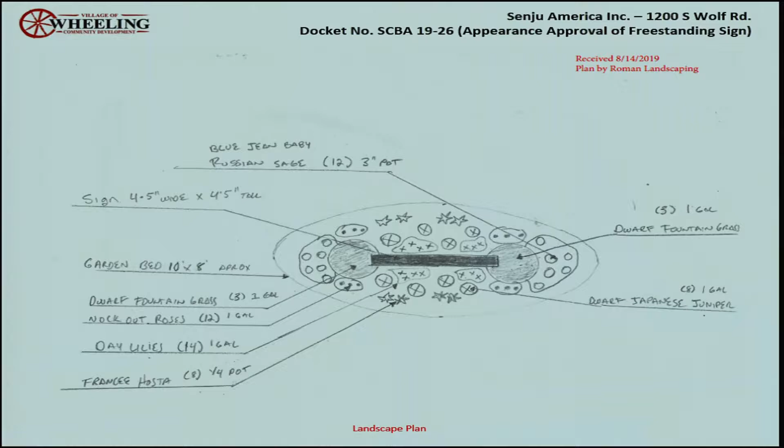Docket number SCBA 19-26, Senju America, 1200 South Wolf Road, appearance approval of a freestanding sign. And docket number SCBA 19-27, Asteroid Precision, 1085 Chaddick Drive, appearance approval of a wall sign. Oh, that's the new spec building on Chaddick. Okay.

Do I hear a motion? So moved. Second. Commissioner Creech? Yes. Commissioner Kalis votes yes. Commissioner Blanova. Yes. Commissioner Yudnick. Yes. Commissioner Sprague. Yes. Commissioner Thompson. Yes. Chairman Johnson. Yes.

Items for review. Docket number 2019-18, which was continued from August 8th, 2019. Village of Wheeling amendment to the comprehensive plan for the station area plan.

The Village of Wheeling seeking an amendment to the comprehensive plan for the Village of Wheeling Station Area Plan to update the entirety of the station area plan. It's public hearing information.

Anything to add? You, Steve? Yes. Okay. Take it away.

As the Plan Commission is aware, the station area plan update has been presented a few times in front of the Plan Commission in draft form, primarily through the summer. At the last meeting, the last full discussion on this was June 27th, where we obtained some additional feedback and input from the Plan Commission. That information was taken, and the final draft that we have tonight has been prepared for your consideration, taking into account that input and some further revisions by the village's consultant on the station area plan.

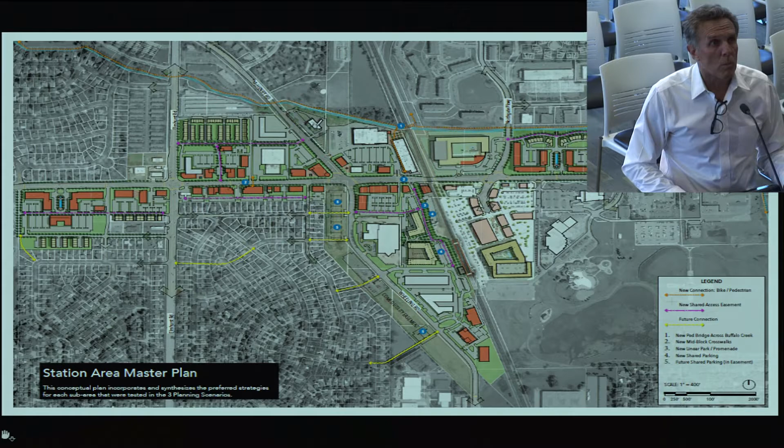Okay, all right. So I was going to ask Tim to lead you through some of the 8 sub-area plans. And for anybody watching who may not be familiar with the history of this project, this is a pretty important page.

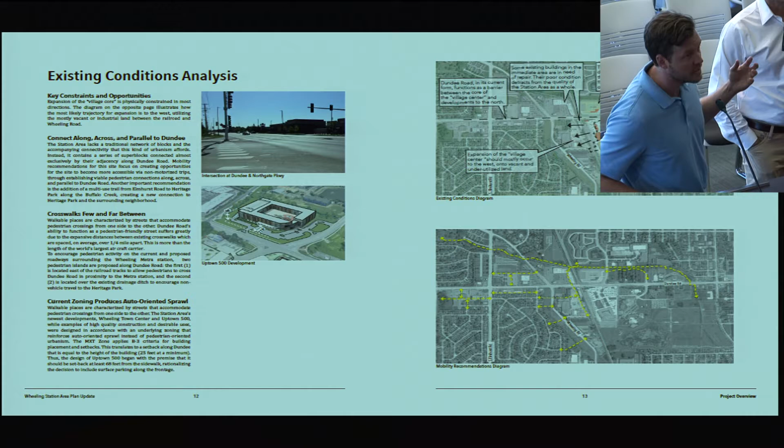This is what we call the existing conditions analysis. We have a very nice beginning of a town center—we've been calling it a pedestrian-friendly village center because 'town center' is already taken. One thing that came out of the survey was broad support for the idea that there should be a walkable core near the station area, but there are challenges to that.

Dundee Road is a bit hard to cross right now. It's not the kind of street that has a lot of strength on either side of it in terms of being able to cross. Also, the train tracks are a physical barrier east and west. This analysis points out that it seems like the natural place for the station area to expand is towards the west, which is something we've touched on in the past, but this page makes it explicit as a recommendation.

And then the idea that a lot of these sub-areas are basically like what we call super blocks. There's not a street network that allows choices of how to get from one place to another—so in the end, they all relate to Dundee Road. Almost the only option is Dundee Road, where they have to have their own curb cut connection that way. That was an important thing I wanted to point out.

One last part here, since it came up last time, was a little critique of some of the recent developments—they're beautiful in a million ways, but not necessarily reinforcing walkable urbanism because they're set back from the street behind surface parking lots. This was a little analysis of the code that got Uptown 500 to be that way—it either had to be set back 25 feet or, at a minimum, equal to the height of the building, which is a 68-foot-tall building.

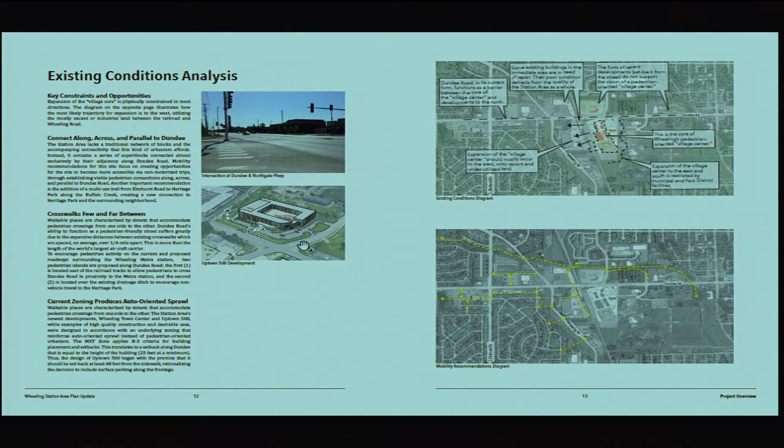It was going to be set back at least 68 feet anyways, so the rational decision was to go ahead and put surface parking in front of all that. So this is all just to say that one of our recommendations is, while you're waiting for some of these priority projects to be implemented, be careful not to allow things to happen that are moving in the wrong direction.

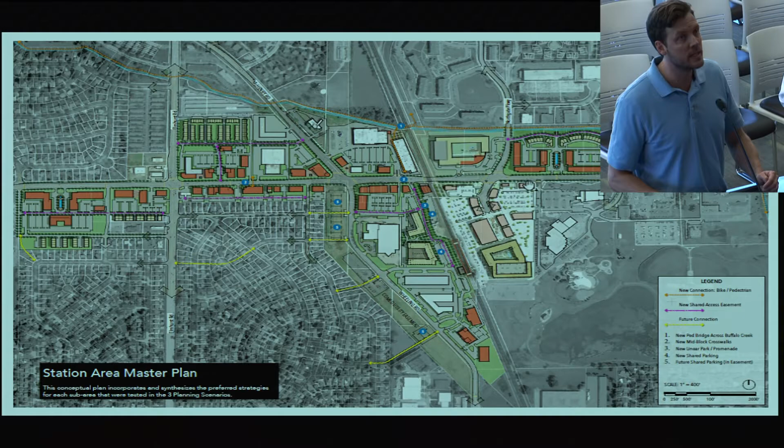Moving now into the recommended plan, this is a hybrid of the three concept plans we presented earlier. For each sub-area, we took the plan that made the most sense, whether that was the coordinate, participate, or regulate scenario. Most of them will look familiar to those of you who saw it before, except for this one here.

What we call the Ozinga site. This is actually a new idea—if you recall, last time we had a Top Golf and a dog park and different things. And like that diagram showed, this is probably the most natural place for the town center to expand into. What we're showing here is basically another one of these multi-story residential buildings. Seems to make a lot of sense there.

But there could be mixed-use commercial along Dundee up here. Also very important is to create a connection, a pedestrian connection at the very least, from Dundee down to the train station. Just to point out...

In case it wasn't already clear, imagine you're coming from the west and you want to get on that train. Basically today what you're doing is walking probably past the train tracks, down through the town center, through a parking lot here, crossing back over just to get there. Wouldn't it be nice if there were a more direct connection here?

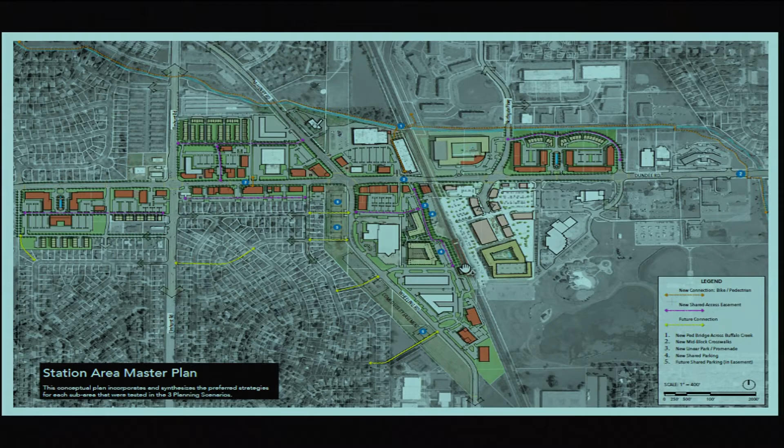What we're showing is even the idea in one of our concept projects here—if this new connection with the Buffalo Creek trail actually happened, suddenly these 600 units of housing here could be directly connected in a pretty cool way all the way down. So let's start getting into each of these sub-areas.

As Doug said, regulate is kind of our lowest level of involvement, and all this really depends on is a form-based code. The form-based code says a couple important things. This orange bar here is what we call a build-to zone. We like the idea of what we're saying here. We're recommending that the form-based code can really study this and get into the details, but more than 50%, let's say 55%, of each property's street frontage should have a building within that zone.

Not a parking lot, not a building set way back, but something that a pedestrian would be able to see through ground floor windows—transparency, that kind of thing. And then importantly, there would be cross-access easements somewhere on the property that allow cars to get in and out without having to have curb cuts all over the place, and to make their parking lots viable.

Basically, what we want to do here is flip the conventional suburban sprawl layout where you have parking in the front and the building in the back—flip that, get most of the building on the front and most of the parking in the back, recognizing that commercial properties do want enough of what we call teaser parking to make their businesses viable. We always try to show a site plan that has some of that as well.

The other thing you'll see a lot in these sub-areas is we go ahead and draw a drive-through, but we draw it so it doesn't put the drive-through up against the sidewalk like you see in some examples, just to illustrate that yes, it is possible. We know the driver's side is on the left and all these kinds of things, but if you're careful on the site plan, you can do it. So in these hypothetical layouts, we're trying to show how that's possible.

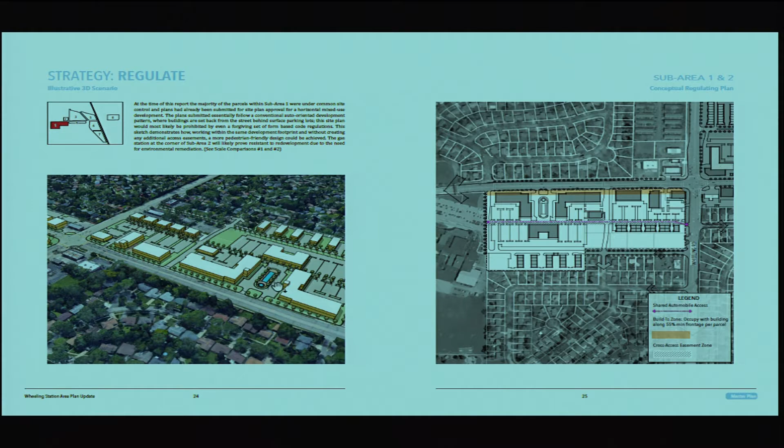And then lastly, in a lot of these you'll see this feature that could be sort of an open space with fountains. I know there are already a few really cool fountains in Wheeling, so maybe that could be a theme that continues along in the station area.

In this next sub-area, we call it 'coordinate' because it would take more coordination between the different properties. This former Kmart property is shaped like this, with a carved-out area. But if they could share this access and continue this street through here, it breaks up what is now a big, massive superblock into something more like a traditional network of streets and blocks.

The buildings along Dundee we're showing as probably 2 to 3 stories, mixed use, ground floor commercial, with upper floors being offices or maybe residential, and in the back here this is shown as residential properties like townhomes.

Moving on to the most challenging block sub-area of all is actually this one, because it's so shallow that there's not a whole lot of room to break it up into smaller blocks. The other tricky thing here is that the parcels have different ownership in each one of these.

But with the end in mind, the top one here is eventually we do want to have basically an alley across the back. But until that happens, we have to allow each property to have their own access onto Dundee, or else they're going to be landlocked. So this would develop incrementally over time and eventually get us to that.

Just an interesting thing I'll point out to illustrate a point. If you remember in the document, in the appendix, we have these case studies or scale comparisons that hopefully paint a picture of when you see something like down here, this building in the corner with that kind of circular thing - what is that? Well, there's a building just like that, so you can look at it and understand better what it is.

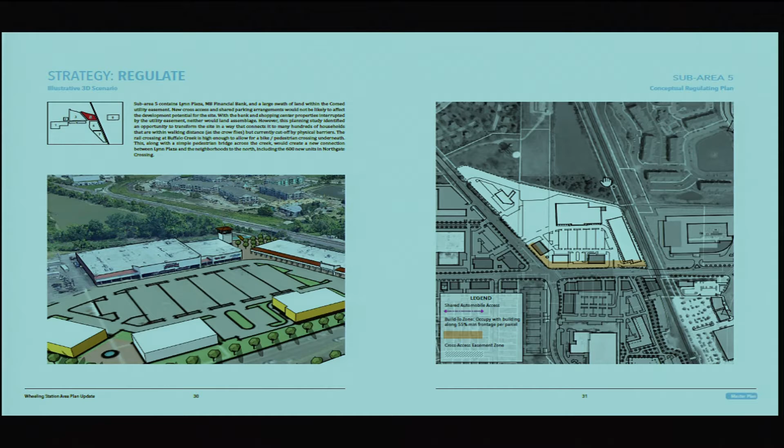It's a great amenity, or it can be, cutting through here and maybe even putting in some new architectural element that's iconic, a focal point that draws you from here all the way up to here. So that's what that idea is about, and I'll try to move a little more quickly.

So this one you're seeing for the first time, folks. Here it is - a residential building here instead of a Topgolf or a dog park or anything like that, that again has this connection, this right-of-way through the village-owned property here, all the way down to the train station, and then mixed use on this.

This is actually all for sale right here, about 3 or 4 acres, all for sale. This depicts what could happen if there was a mixed use building that holds the corner, puts the parking in the back, and allows access through the back side of it, like what we would recommend. Then down here, this is probably more industrial buildings.

This is, if you guys know Lurvey's in Des Plaines, their buildings put on there just for scale comparison - so maybe it's something like that. What is that business? Lurvies is a landscaping company.

It's a really great sort of layout - they have greenhouses and stones and these kinds of things. But just for scale comparison, that's their 3 buildings put on the site. Seems to fit pretty well, and it seems like it'd be compatible with the kind of industrial uses that are there. But to back up in general, we're not making specific recommendations about what businesses should go there, unlike the 2004 station area plan where the market analysis was very much in that vein.

In this case, Bridget advised that rather than try to have a crystal ball and predict exactly what businesses the village should attract, instead make a form that is compatible with a pedestrian-oriented environment, and that it can be flexible to accommodate things like offices or apartments on the upper floor and ground floor commercial as well.

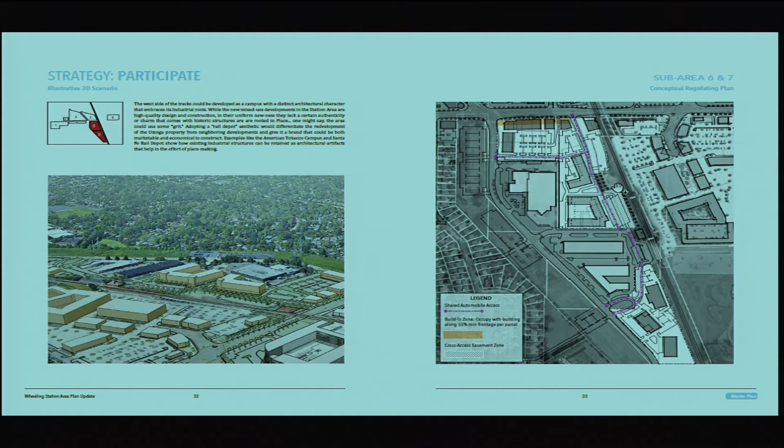I'll get back to this because this is actually one of our high priority projects, so I'll talk a little bit more about that. And then finally, the property right across the street - I'm a little turned around, but right across the street here. This is exactly the same as everybody has seen it the last few times.

What's exciting about this one is that we think it can be done in phases, incrementally, using property that's already under common ownership plus the village-owned property here, which is why it's called participate - in this case, in order to pull this off, that property would have to get sold to the folks who own all of this, and then eventually the rest gets assembled, and it becomes the ultimate vision, like that.

So I can stop here and take questions, or just move right along. What do you guys think?

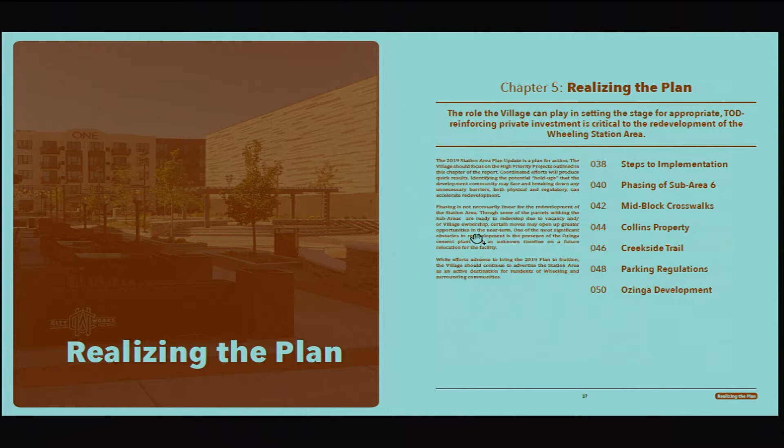Okay, so Doug, I think I'm going to hand this back to you here.

So this is on page - boy, that text is too small - 38. So on the left there, sort of 5 steps to implementation.

I think it's important that we've invested this time and you have invested the resources in developing this plan, that we have a clear path forward. So step number 1, adopt this plan, which is what Steve is hoping to get a recommendation in favor of. I think it's a clear plan, it's been vetted a number of times. I'm sure there will be questions, but we hope to answer them tonight.

Second is create a form-based code. Tim's referred to it a couple times - it's just a better version of zoning. It's pedestrian-oriented, and it would apply in the station area. We hope that happens next, ideally in your next budget year, sooner rather than later, so that, as Tim said, we avoid bad things happening that work against the plan.

Third is market this plan - who's the gentleman that showed up to the charrette that does marketing now? The guy... marketing sites here... brain fart from last November, but somebody here that does marketing of the land.

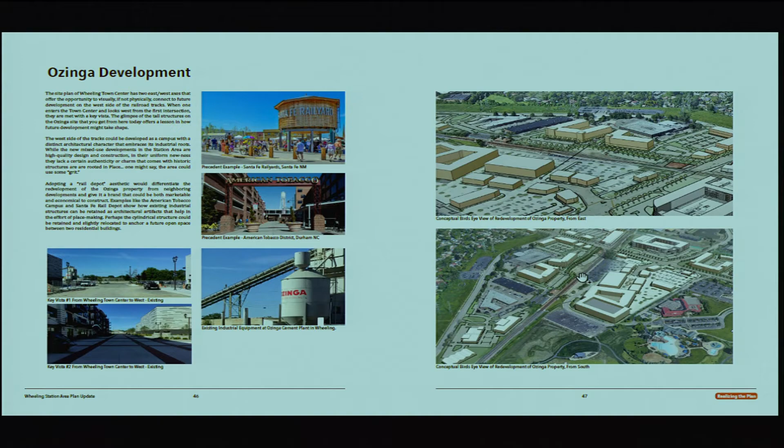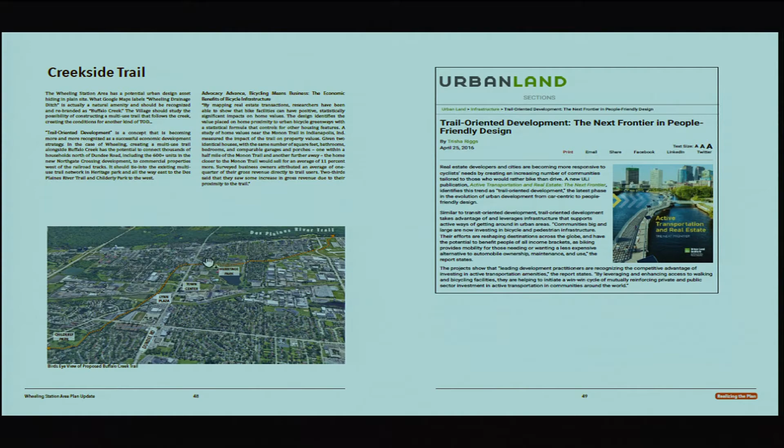And Wheeling already has so many assets that could be connected from this, all the way down to the Des Plaines Trail, to the park, and the park up here, going right through the middle of the downtown. So that's something we think should be given serious thought and consideration.

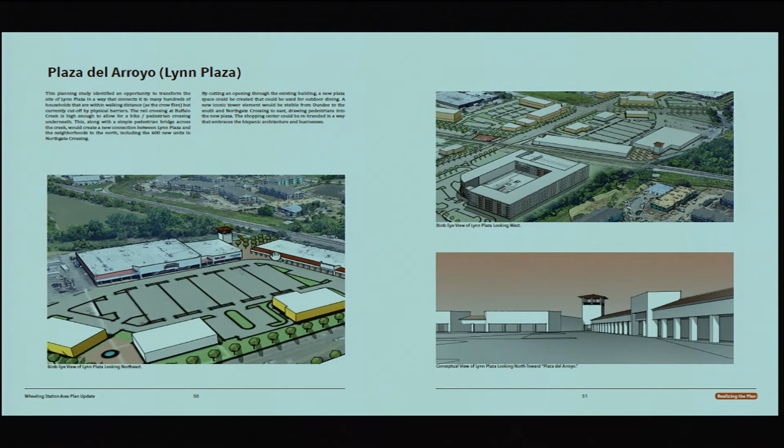And then finally here, the Lynn Plaza—I thought, well, maybe again with the rebranding, Plaza del Arroyo, a bit more interesting. This is that tower element at the end that draws you from the south side of Dundee up to—what's going on over there? Well, there's a beer garden, or some kind of outdoor dining that may happen there on the creek with that new bridge.

And then finally, parking regulations. At our last meeting, we talked a little bit about when Kelly from Sam Schwartz was here, the idea that the village may want to look at their parking regulations. Right now, it seems like, especially in the station area, they may be asking for more than is necessary, and that you could open up land for more valuable uses than parking. So this is just the final recommendation to consider doing that.

Any questions, anyone? This ends the formal portion of our presentation.

Commissioner Thompson, any questions? No. Commissioner Creech? Nothing. Commissioner Yednek? My turn? Go for it.

Yeah, I had a lot of stuff. I really like the new format. It's much more of a recipe for implementation. I think we were asking for that quite a few times, and I think it lays it out better.

I'm assuming that we would try to be using something like this as a marketing tool, working with the developers. With that being said, there's still a lot of errors and typos that need to be fixed up. Your version now was a little bit different than what we had—we never had the Lynn Plaza in the pages you just went through, and the parking. If you go all the way back to the beginning, let me see where I was at.

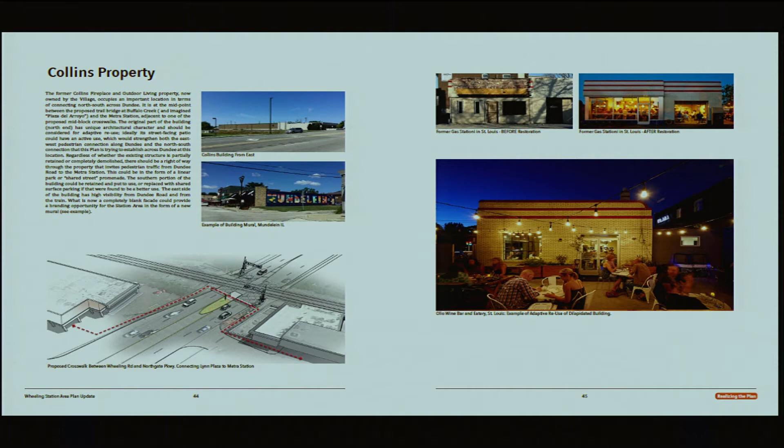I don't know if we said that - I wasn't a fan of Topgolf, I thought some people were, some weren't. I thought we did a poll, I don't recall. It seemed clear to me on the 27th, when I was here, that since some people liked it and a lot of people didn't, that wasn't what we were going to recommend. We talked about the fact that there would be high fencing up there and the lights.

Right, and so it's in the appendix - it's just still in the reference appendix, it still has the pictures of a proposed option for that lot. And really, the appendix is just kind of a historical artifact at this point. Okay, alright, I wasn't sure if that was the case.

But again, just some typos - I want to present a good face for the village if we're going to send it out to people, and they're going to say you don't live on the Fox River, all that kind of stuff. If we can clean up some of those things - but I really, really like the new format. I think it's much more what we were asking last time, give us a recipe for implementation, and I think this is very clear. I especially like the bullet point about, if you don't have the formal process in place, try to informally implement as you go along - number 6 on your 'don't screw it up' bullet point. That's very helpful guidance. So that's all I had.

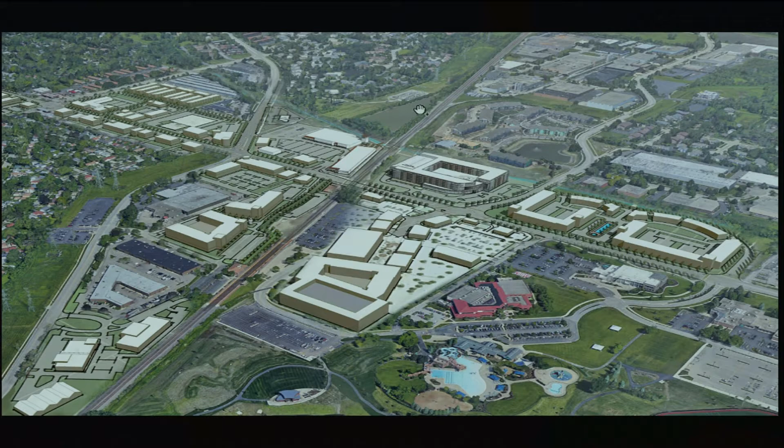One thing I was going to point out, because I've meant to mention it before, is we've always been planning on doing a couple of professional renderings, photoreal, really cool marketing renderings. We didn't want to pull the trigger on that until we knew we were illustrating the right thing that was approved. So if the commission decides to recommend this plan and things don't change much, we'll have a couple renderings done for marketing, the really sexy stuff. We did a couple in-house mock-ups I wanted to share with you - an overall view that stitches together the existing and the new, and here's a view from the south, or looking west, just to consider.

We can check in with Steve and see which is preferred. We could do ground level views of one of the high priority projects, just something to keep in mind. The other question I had - I like the concepts and it's all great, but how do you work with it if you have a developer that says, well, I want to change that fountain or I want to change that driveway?

Conceptually they're creating a courtyard, but maybe they have a different view of the courtyard. I'm assuming that's planning, that's village board - we're going to say we want a courtyard there, if you come up with a neater plan, show us what your options are. We're not casting this in stone for the developers.

I would just say that the adoption of the form-based code would govern where buildings are placed and how they address the street or the frontage - that'll be the most regulated part of this. The other part, once it's adopted as a sub-area plan, is the land use - that's the first kind of cut, is the proposed development in compliance with what the land use plan calls for.

I don't think... this drawing, I went to this page in particular just to show that kind of fountain. Design a good fountain, but this is just a placeholder of a concept. Because this one's really much more about the kind of phasing - how the west part can go, then the village-owned part, and then the east can come later.

But our guidance doesn't say build this - don't build this. Maybe they might even want a fountain feature, maybe they want a landscape courtyard with some little tables and umbrellas. So we're not forcing the developers into a cast-in-stone design.

One way to think about it too is if the form-based code happens, and let's go back to that property - really all the developer would be on the hook for is to make sure they have the minimum amount of building frontage in that orange zone, and that they have a cross-access easement along the back that aligns with this intersection and this intersection. Then they can do whatever - there's probably 100 ways to do this, better ways to do it, but it's probably helpful to paint at least one hypothetical scenario, just to paint a picture, but definitely 100 other ways to do it that still follows that.

And I was just going to comment on this for the two new commissioners - this was a site because I think the developers came to the village a gazillion times and were very eager to get something that resulted from this process that the village would view favorably.

One little detail that I'm really happy with that came out of this particular site plan - you can see how we've arrayed townhouses in a kind of double crescent.

And this is re-envisioning the creek. It would never be the Fox River, but envisioning the creek is something you give a little room to, so that there's a kind of bank and the potential for a little bit of landscaping. It's not just a ditch - you give it a little more space.

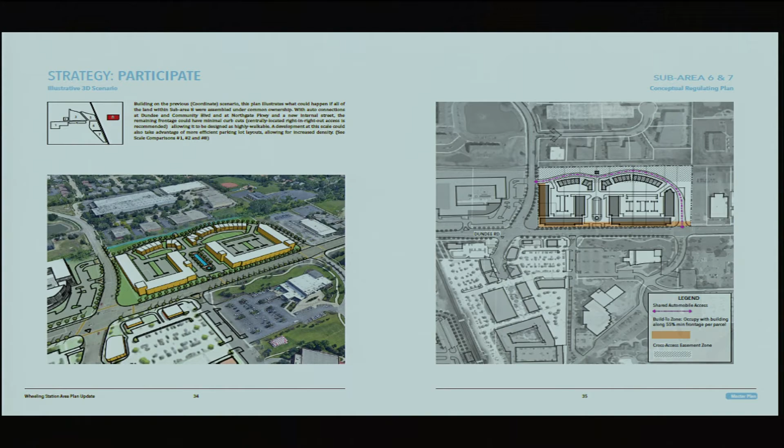And so that sort of setback off that facility would be something that could be set in the form-based code, but how each individual developer would propose to you to do that would be down the road, and you'd be judging that between the applicant and yourselves.

Okay? And you're hired for proofreading, but - yeah, I think you got a future there.

Commissioner Kalis. Thank you, Chairman. First thing I was going to say is thank you, Commissioner Yedinak, for your eye of detail - I didn't catch any of that stuff, so definitely appreciate that. And I think it's a good point that we want to present ourselves favorably to suitors, as it were. So thank you for your willingness to work on that.

I guess since we were talking about that property, that's Area 6, the one right across the street. So in situations like that where the village might own some of the land but not all of it, and there's a lot of different constituents on that whole stretch of land - if everyone's not in agreement, and you were to, I think you mentioned, sometimes you build part of it with the idea that in the future the other part will be acquired, and then you can build block A, and then 5 years later build block B.

Does it look weird? Like if they build half of it, assuming that the other half is going to be ours someday, you know what I mean? You want the whole thing, but if you can only get half at a time, it's kind of just - in your experience - yeah, so if you only got the right side because the developers that have come here don't want to agree to us, what sort of experience do you have with that?

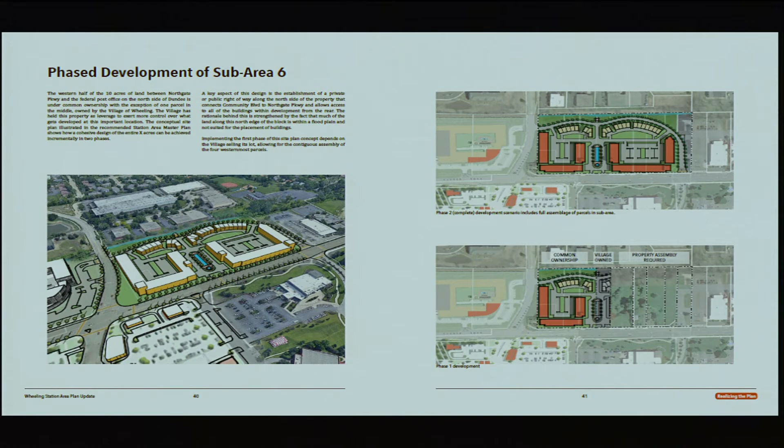That was one of my specific questions, that road in the back. I love this idea, but there's three property owners involved, and if you build half of it on the western half, build a dead-end street, that'd be weird. But if you got eminent domain and were able to go all the way through, that would make sense. Just wanted clarity on that. Short of eminent domain, you could negotiate an easement, so you don't have to own the land to have a path across it. By the way, that north end is in a floodplain anyway, so it's a little easier.

That dovetails into my next point about the Buffalo Creek, which is not the wheeling drainage ditch, right? I love the idea of a creek walk. A lot of that land isn't suitable for building anyway, and there's stuff on Milwaukee that's the same way. I'd love to make it a destination where we're known for our awesome creek walk, instead of this ugly drainage ditch that's an eyesore in the middle of everything. Make it so there's an actual walking path, like the Naperville River Walk or something. We'll see what happens, but I love the idea of making it an actual destination instead of being embarrassed by it in our village.

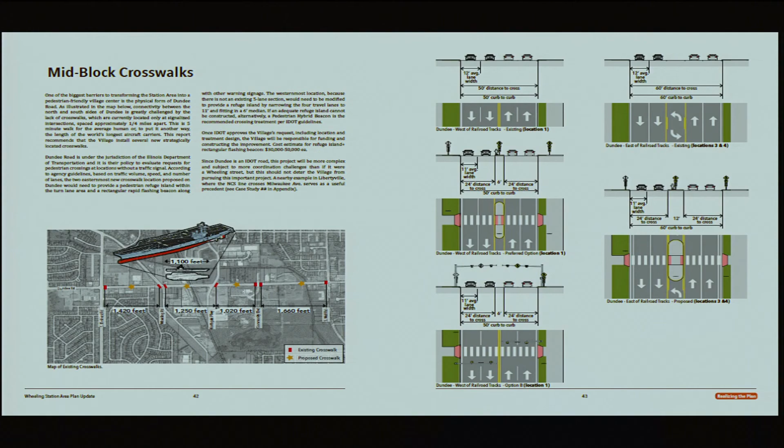Now, you're right, that's a good point. We prefer the 11-foot lanes because it gets cars to travel, at least more likely they'll go the posted speed limit, which is what we want. If they could stay in the lanes too, but people tend to wander, and taking any cushion away is a concern. Yeah, and there's trucks and everything.

It just seems like the 12-foot lanes seem like an invitation for people to drive faster than they should. Well, not at 6 o'clock. Okay.

It seems like there are some spots along Dundee that are narrower already. So that would have to be looked at closely.

I think at this point, there were some liberties taken, like carving up existing businesses like Stasek Chevrolet and putting in new things. Obviously, that would not happen very quickly, I don't think. Okay, that's really all I had.

So we are looking for a motion to recommend approval to replace the current 2004 station area plan with the Wheeling station area plan update, a transit-oriented development plan to guide development around the Metra station. That is docket number 2019-18. Do we have any conditions that would apply to this?